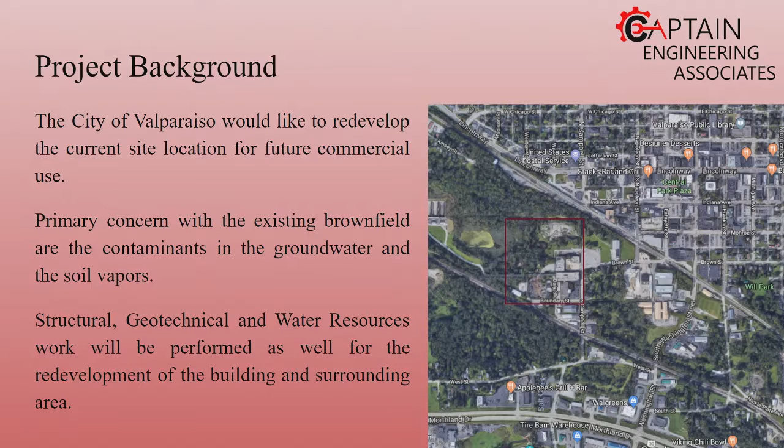It's located south of, if anyone knows where Franklin House is, it's located right there. This is the existing site. They would like to redevelop this area for more interest in the area and future growth for the city itself. Journeyman Distillery would also like to move into the site.

So we're going to do geotech, water resources, and structural designs for the distillery needed. This is the current site. It's been abandoned and it's not looking pretty. After our design is complete, we would like to transform it into this rendering that we have here.

The existing issues on site, for the South Campbell site, include groundwater, soil, and soil vapor contamination. We also have asbestos in the roof that needs to be treated, and because of the abandonment of the building, safety of the building is also an issue.

We also have a South Franklin site, which is a culvert, and the culvert is in poor condition and in poor soils, so that also has to be taken into consideration.

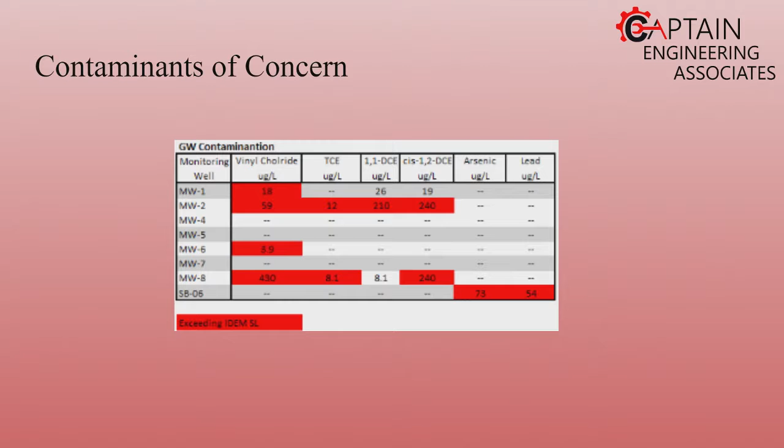For the contaminants of concern, these are the groundwater contaminants. We have TCE and its daughter contaminants present in the water, as well as the heavy metals arsenic and lead. The red cells are the monitoring wells where the contaminants exceeded the 2018 IDEM screening levels.

We can follow that up with the soil vapors taken from within the building. The soil itself is contaminated, but it is below the 2018 IDEM screening levels, so we will not be remediating the soil itself.

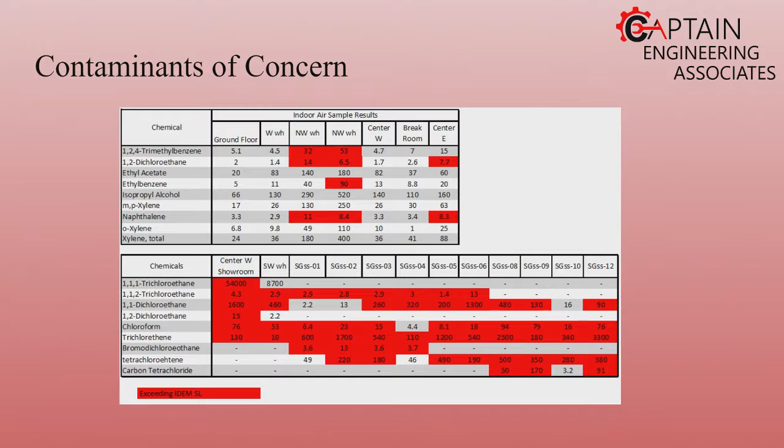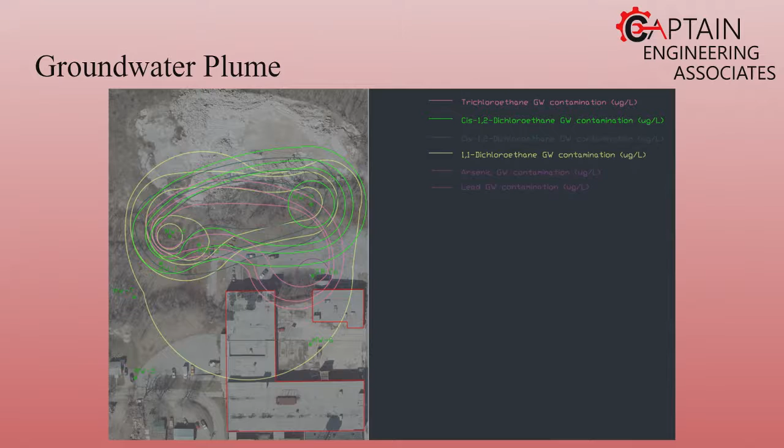This is the groundwater plume right here. The primary concentration for treatment is north of the site, probably 100 to 200 feet up north.

For the heavy metals, we're going to use a precipitation, coagulation, flocculation system, with 3 extraction wells with a radius of influence about 50 feet. That's going to go through a rapid mix tank, and we'll use a sulfate ion mix to get the arsenic and lead flocculated, which will be right here.

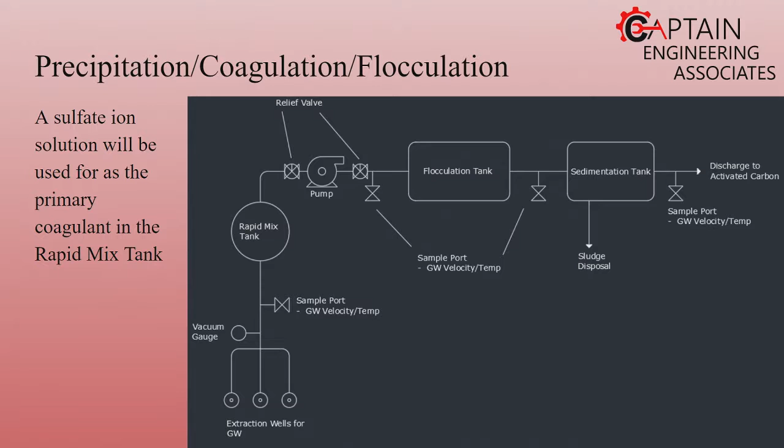Finally into a sedimentation tank. The sludge that is produced in this will be taken care of by a third-party company and disposed of properly as a hazardous waste material.

Once the groundwater is through the PCF treatment train, we're going to have it go through an activated carbon treatment so that we can get rid of the TCE and its daughter contaminants. That's going to go through a filter to remove any extraneous material still in the water, and then it's going to go through the activated carbon.

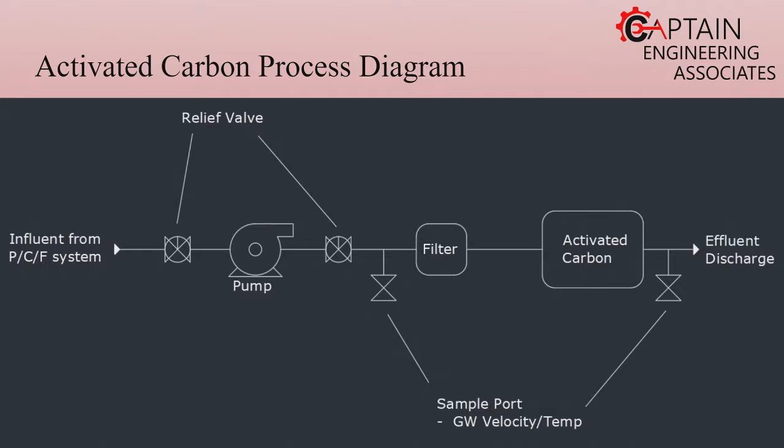Once that's deemed clean enough, using the sample ports, we're going to discharge it upstream of the site and reintroduce it into the groundwater.

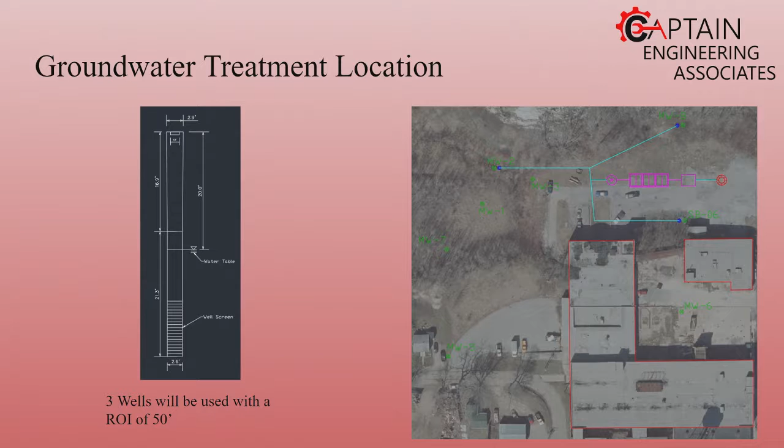This is the location of the train that we're looking at. The pumps are going to be located right here. We're going to have them go through piping up here, and then this is the PCF system, and this is the activated carbon tank.

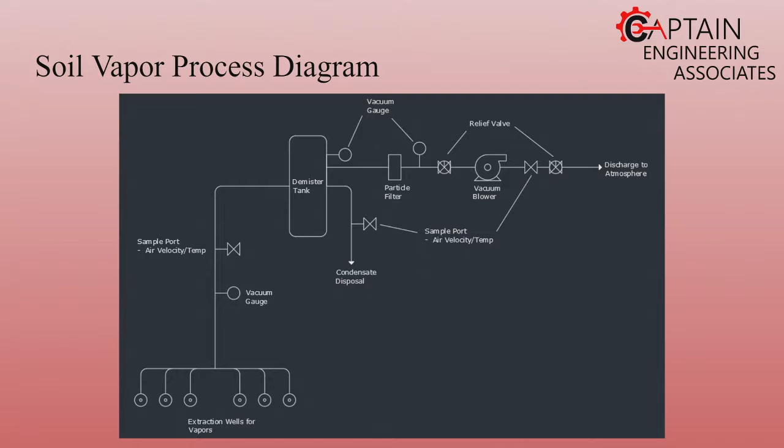For the soil vapors, we will be looking at about 6 vertical wells, located at spaces within the building. They're going to go through a demister tank, and any condensate created by that will also be taken care of by a third-party company and disposed of appropriately.

It's going to go through a particle filter, and finally through a vacuum blower, and once the samples meet the IDEM and EPA discharge levels, they're going to be discharged into the atmosphere without harm.

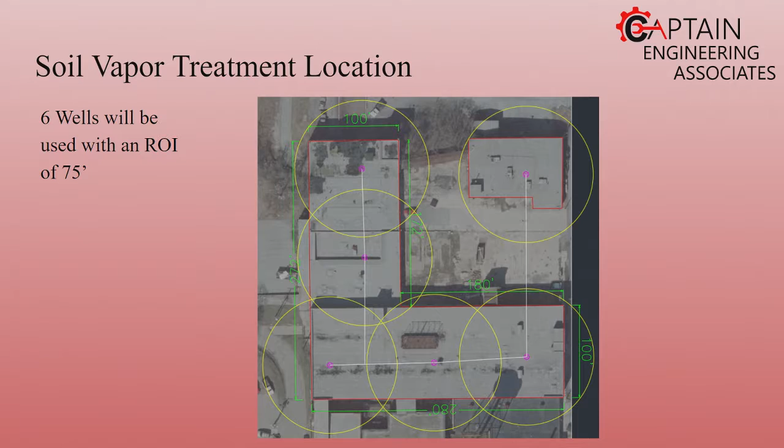This is the location of our extraction wells, and we're going to have 6 of them with an ROI of about 75 feet. Now I'm going to pass it off to Jemima, our structural engineer.

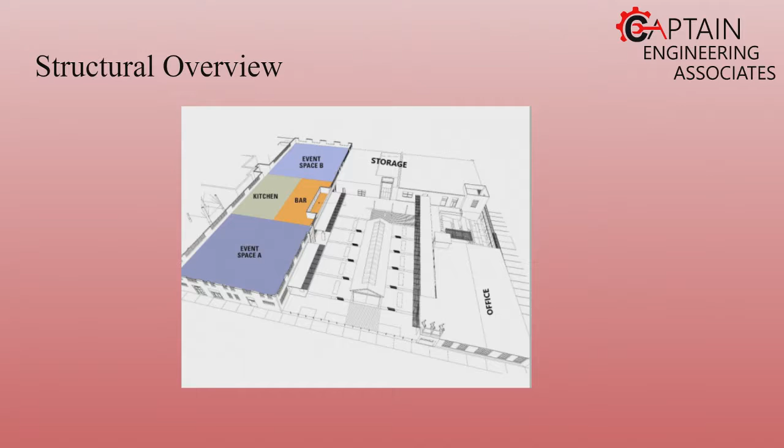As Antoine said earlier, we are redeveloping this site, and Journeyman's Distillery would like to have a distillery on this site. So we decided to put the distillery on the ground floor of this building and have event space with a kitchen and a bar on the 2nd floor, storage space in this building right here, and use this for office space for any workers in the distillery.

This is an overview of what the main floor of the building looks like now, as is. We decided to leave it as is because we did not have blueprints of the building, so we couldn't get the capacity of the building itself. So we assumed that the ground floor would be suitable for the distillery. This is how it is right now, with a stairway right here, an elevator right here, and another elevator down here that isn't shown in this plan.

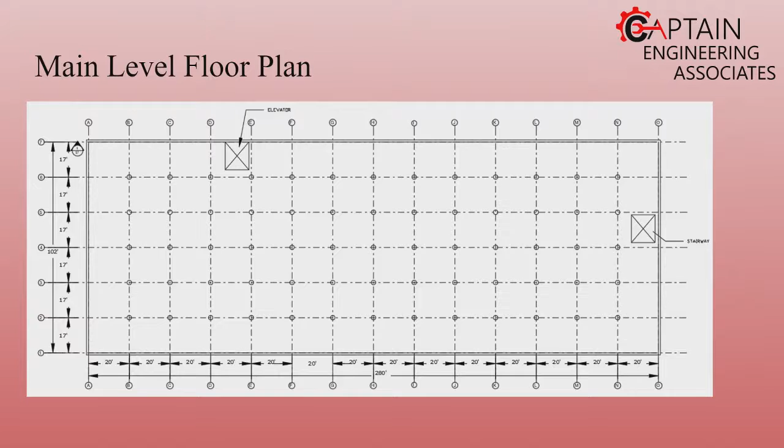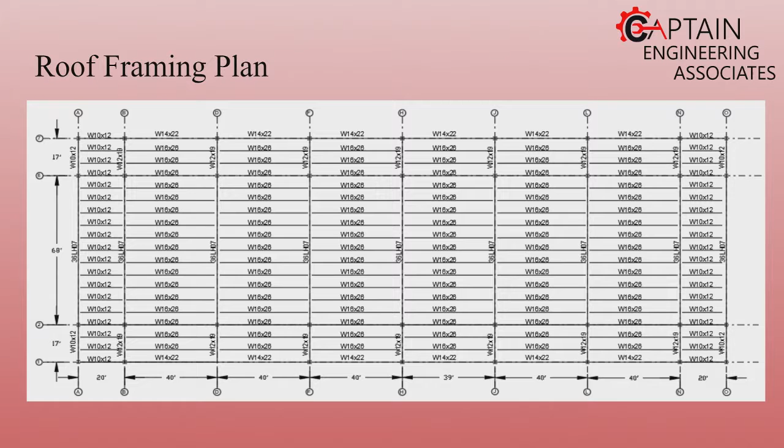The 2nd floor of the building, as said before, is going to be turned into an event space. In order to create open space for the event space, I took out 3 rows of columns right here to create 68 feet of open space for any type of reception or gathering that would be held there. I also took out some columns in the middle areas right here just to create a more open space on the 2nd floor.

This is a better view of how the space is going to look. On the bottom floor, you can see the columns are very closely packed, and then this shows the 68 feet of open space right here, and shows how some columns are removed on the 2nd floor as well.

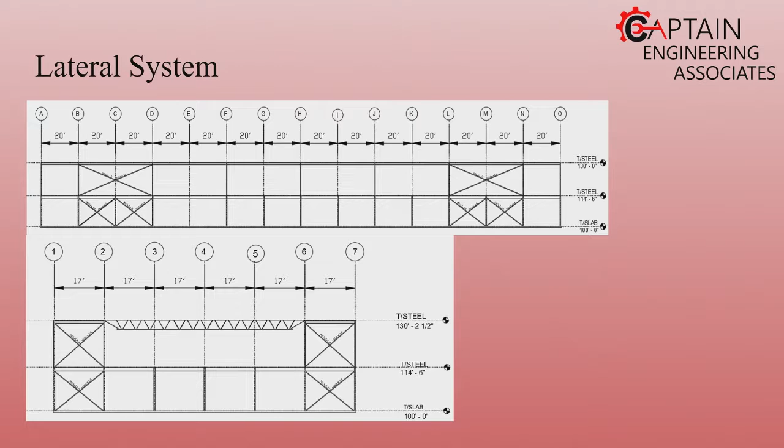With that, I'm going to pass it on to Jeff, our water resources engineer.

To begin, I want to go over some of the requirements that we had from the owners, as well as to comply with all the standards and regulations of the City of Valparaiso's Stormwater Manual. We were tasked with designing best management practices suitable to the site. A best management practice is basically a way to reduce runoff volumes and to remove total suspended solids, total nitrogen and phosphorus from the water to make it safe to dispose off-site so it doesn't contaminate more bodies of water or any other groundwater.

We were also tasked with redesigning the South Franklin Street culvert. Moving into the South Campbell site, we used 2 best management practices here. One is the biofiltration planters that were seen on the original 3D rendering that can also be seen here - one along the storage building in Building B, another one right here, and another one along the office building up to where there's a shipment door.

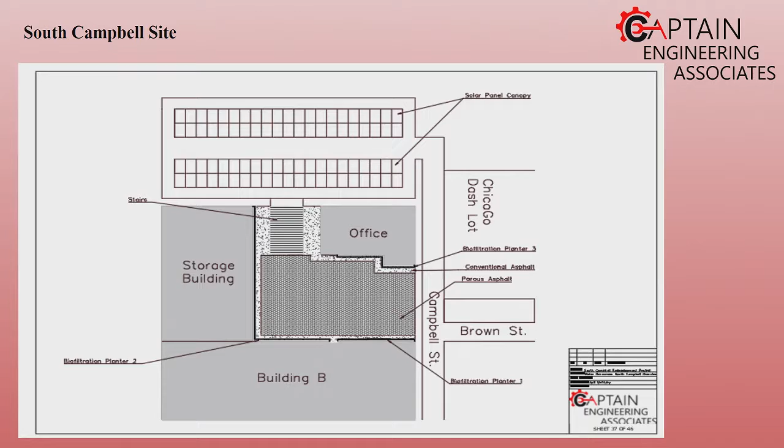We also used porous asphalt in the middle to utilize that space as a best management practice as well. We did keep the porous asphalt 10 feet away from the building to refrain from having any structural damage done to the building from infiltrating water.

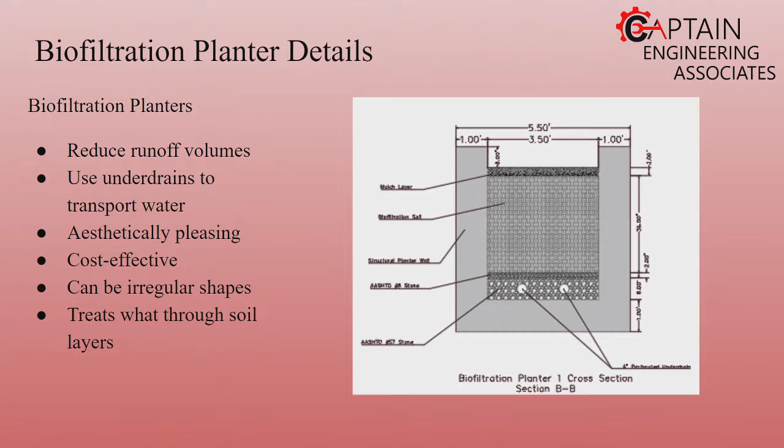Moving into the biofiltration planters a little bit, this is basically what they look like. Water comes in through the top from the roofs of the building, and the water quality volume - a small amount of the actual total runoff that the storm will give - will go through these planters and through the soil, removing some of the total suspended solids, phosphorus, and nitrogen in the stormwater. They also use under drains to transport the water to a proper and approved disposal point. They're also very aesthetically pleasing, cost effective, and can be made in tons of different shapes.

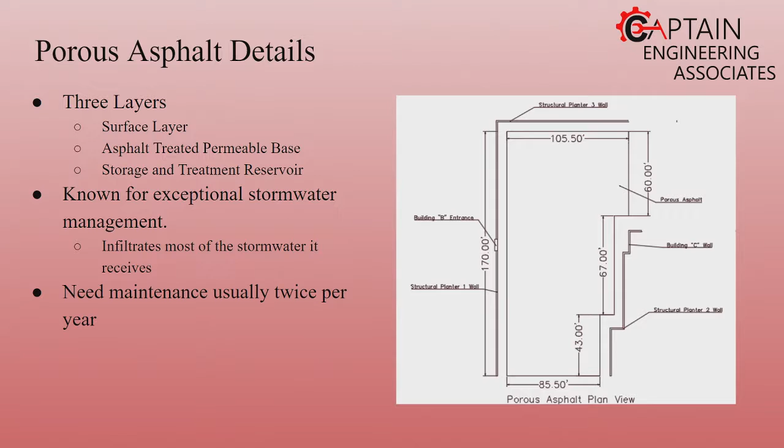And then we have the porous asphalt in the middle. This is basically the layout of it alongside the buildings. They have 3 layers: a surface layer that looks usually just like conventional asphalt would. However, underneath there's a treated permeable base as well as a storage and treatment layer. And then after that, it will infiltrate all the way into the normal soil on the site.

They're known for really good stormwater management and can infiltrate most of the water it receives. They do have an overflow—there's an overflow weir right there just in case the storm is too big for the porous asphalt. The big thing with these is that they need maintenance usually twice a year, to be vacuumed so that they don't clog. These are examples of what the porous asphalt is like.

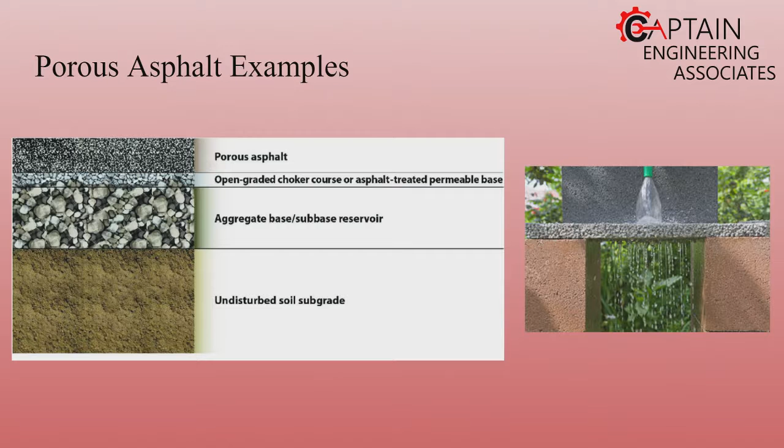Like I said earlier, porous asphalt, an asphalt treated permeable base, and an aggregate sub-base reservoir for the water to store and infiltrate into the soil subgrade. This is what happens when it goes through the first couple layers and is treated by the porous asphalt. Then we move into the culvert design, and we ask ourselves why it's needed.

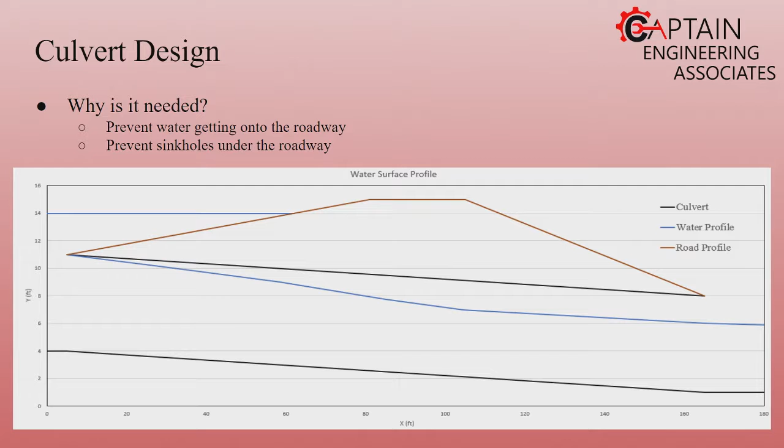Basically, a culvert is needed to prevent water from getting onto the roadway and making it inaccessible after a major storm. It also prevents sinkholes under the roadway from water moving underneath the road. In this profile, a side view of the culvert, the black lines are the culvert, the orange is the embankment and roadway up top all the way back down, and the blue is the water line. As you can see, it does not overtop onto the roadway, and we have a good design.

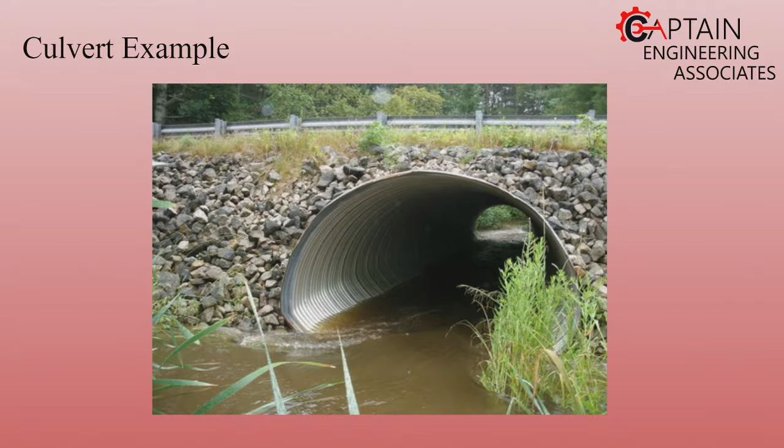This is an example of what a culvert does. Just make sure that it's good on the embankment as well. And with that, I will pass it off to Ben, our geotechnical engineer.

Thank you, Jeff. Everyone's still awake? Great.

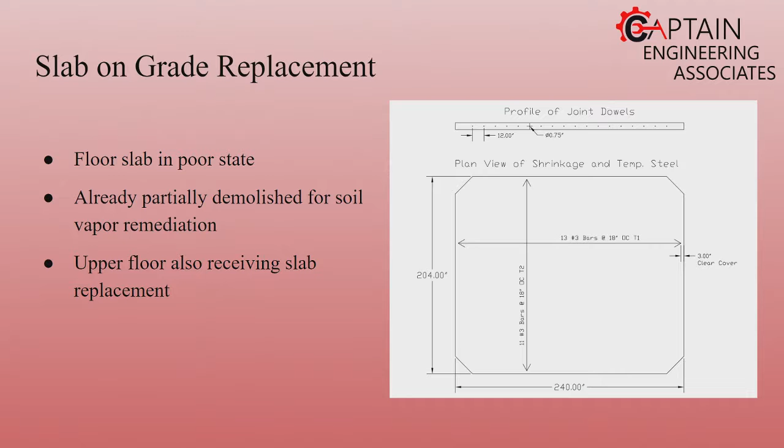One of the challenges with the geotechnical aspects of this project was really figuring out what kind of work actually needed to be done to the site. Because a lot of what I deal with are kind of just little odds and ends that clean up some of the loose ends that our other disciplines have already addressed.

First off, we are going to be replacing the slab, the concrete floor, within the bottom floor of Building B. There are a couple reasons: first, the floor is already not in the best condition because it's a very old building. We're also drilling wells for the soil vapor extraction—those aren't very big holes, but since we're drilling them, we might as well take out the entire slab.

Also, I needed more design work, so I threw that in there—I designed a new floor for that. There's also going to be a new slab on the upper floor, so we figured we might as well replace both to keep it consistent.

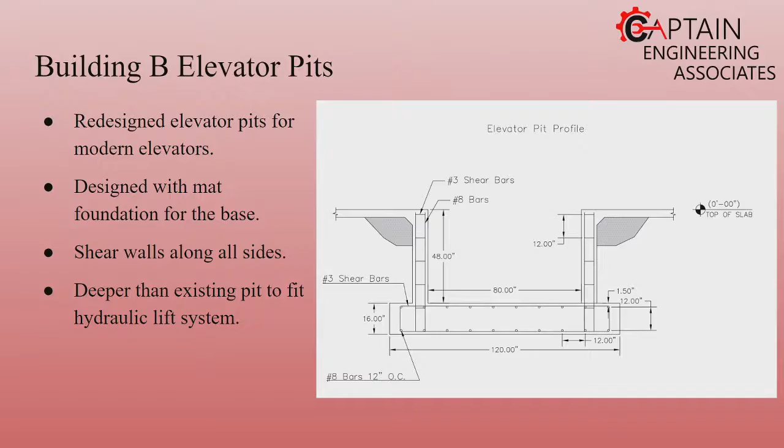We're also going to be putting in new elevator pits because we're incorporating more modern elevators; the building is very old. We're not exactly sure what equipment is used for the lift system on the current elevators, but we're assuming it's not a hydraulic system, which means we'll likely have to bring down the level of the current pits. So I've designed elevator pits now with a mat foundation and shear walls along the edges. This is just a profile view, but there will be 4 walls around the perimeter of this elevator pit.

We're also going to be putting in a solar panel canopy within the parking lot. The reason is that one of our main goals for this project was to create a staple site for Valpo in the downtown area, something that really caught your eye, and we thought this solar panel design was an innovative solution to a couple of problems on the site.

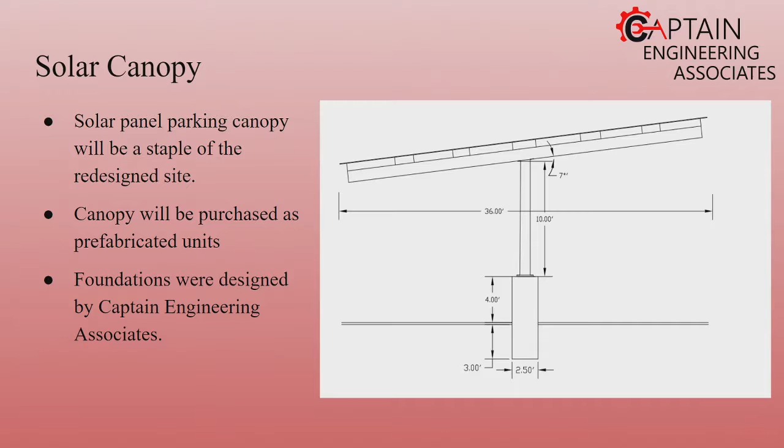First off, this is next to the Chicago Dash parking lot, so we figured customers of that service would be able to use this parking lot and these canopies, so that when they park to use the bus service to Chicago, their cars would be shaded from the sun and weather. It would be a very elegant solution to that.

We would also provide solar energy, clean energy, which is very appealing to the nearby building, and also potentially sell back some energy to NIPSCO.

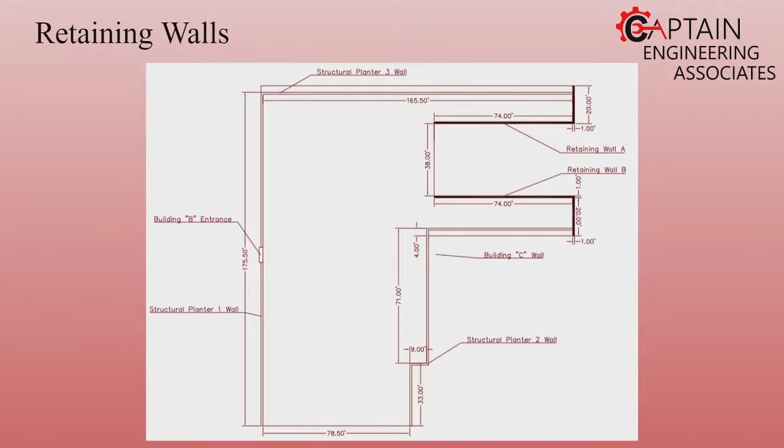We're also going to be putting in 2 retaining walls on site. This is the northern end of the site here, the building's here, the parking lot would be here. Right now, in this spot, there's just a big hill. So we're going to be installing a staircase that goes from the parking lot to the courtyard where the building is, because normally you'd have to go all the way around. There's going to be a staircase here, and then a retaining wall here and here, because these sections next to the buildings are going to be higher than the stairs, so we need to hold back those soils.

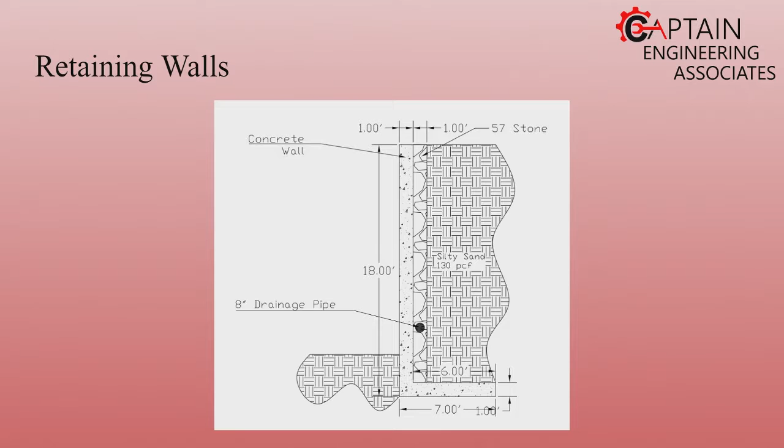Here's a profile of the retaining walls. They're both going to be identical. It's going to be 15 feet high, and go 3 feet below the ground. So in total, it's going to be an 18-foot wall with a 7-foot leg, with proper drainage and reinforcement.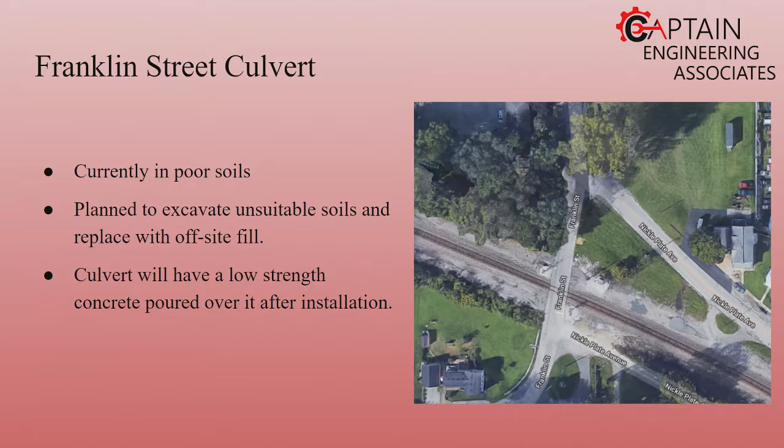Essentially, we're going to be excavating about 4 feet below the current culvert, take out all that soil, and then import nice silty loam. We're going to put that in the bottom, install the culvert, and then fill on top of it with a low-strength flowable concrete to give it some rigidity, then backfill the rest with the same silty loam material.

Now to go on to some social and economic benefits. First off, one of the biggest things is we just want to create a nice downtown experience for Valpo that people really want to go to. I think one of the biggest benefits is that it's very aesthetically pleasing, a place people will want to go to that looks nice. I think that will also increase the property value of apartments likely planned for the nearby area, as well as improve the quality of life of the nearby area.

The solar panels will also provide clean energy to the area, and finally, when we clean up the contamination on the site, it's going to create a much cleaner environment for the city. Finally, for our cost analysis, it'll roughly cost around $10.5 million for the final product. With that, I'd like to invite my colleagues up for any questions or comments.